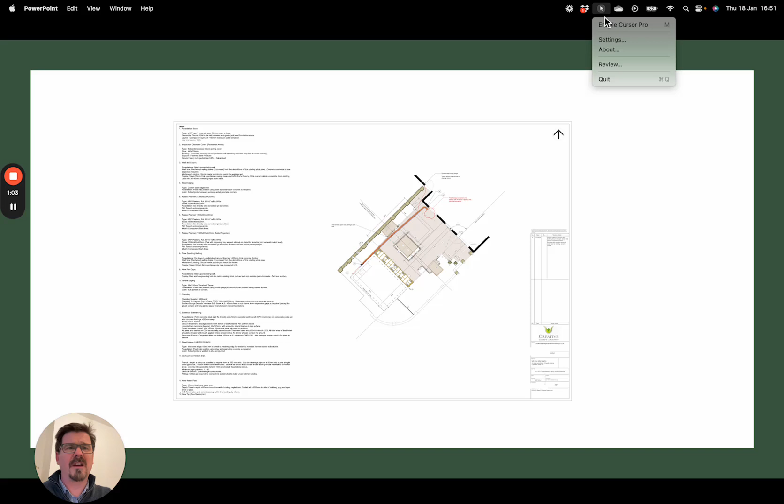As we work through the process of thinking about the garden and how it's constructed, we often think about the initial groundworks and the foundations that go into the paving, and in its simplest form that could be the foundation stone for a simple patio area. In this particular example, we've got a project where we've got to install and connect into existing drainage. We're providing drainage pipes out to a new garden building at the bottom of the garden.

We're thinking about the footings required and the retaining required for these small planting beds, as well as the footings for the water feature here and the raised planters and beds here. We've got inset manhole covers where we're replacing to hide away existing services as best as possible. And we're also thinking about the position of the posts and all of the detailing for the decking platform that runs to the front of the building here.

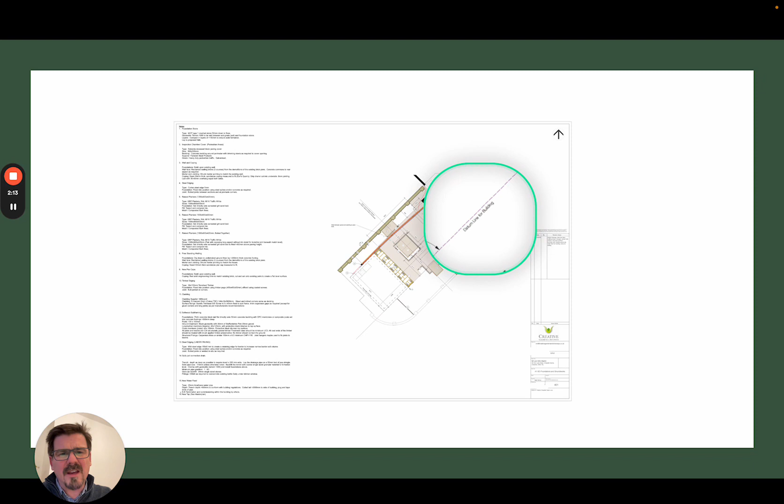All of these things interact at the underground level to ensure that what we're laying out will functionally work when we get above ground. Similarly, we're also looking to give some dimensions on these plans so that everything is relatable to the design intent. With that in mind, we're giving a datum line so that we know that the building has been given a clear dimension and a clear position within the garden. And quite often, once we've got core elements of the foundations in place, the other elements of the garden actually start to come together quite easily.

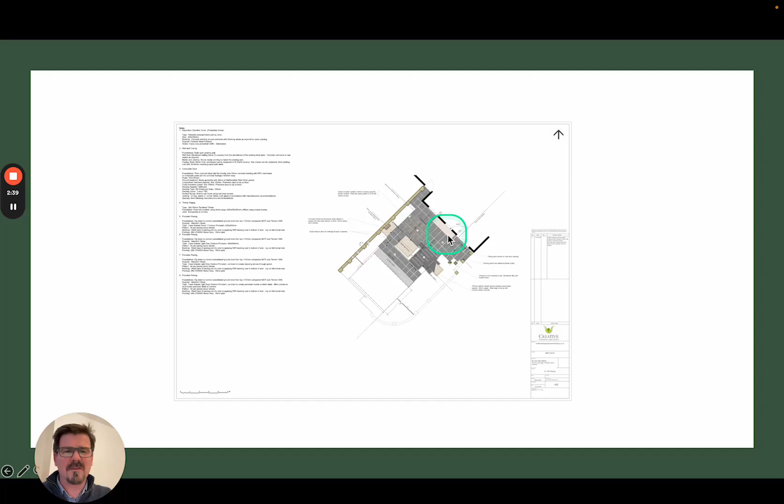So once that formation's in, the setting out plan for the paving in this instance will be more about the detailing, the cutting, and how we're getting equal joints around the perimeter area here. It might be how we're cutting some stepping stones. And you'll notice on the drawings we've got these little sort of numbers dotted around the place. They correspond to the specification of works, which again helps to tie up all of the decision making that goes on as part of the process of developing these gardens going forward.

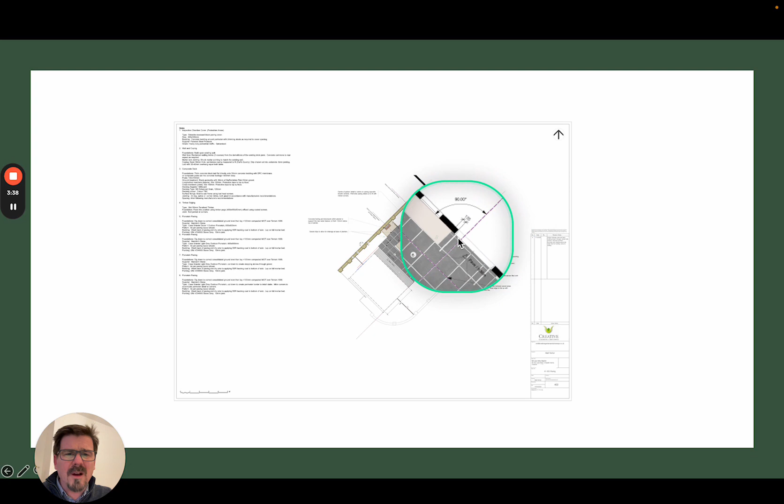So if we have a particular paving material, it may need to be laid in a particular way with a particular joint size and maybe even a particular joint pointing material. All of that information needs to be detailed so that we've got all of those decisions recorded going forward. So in regard to the paving, we've got some datum lines again for the building and so on. We're actually allocating a line through here which will be the first line of paving that's going to be cut, so that as they work back towards the house, there'll be a small cut against the house, but this will be rather insignificant and not noticeable.

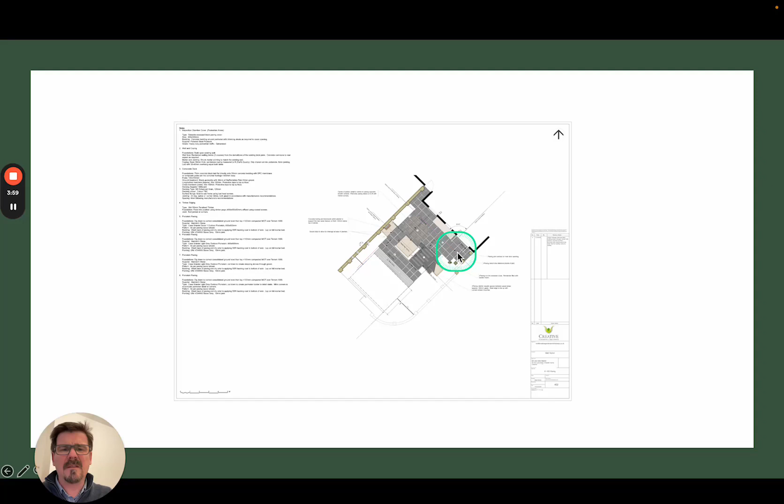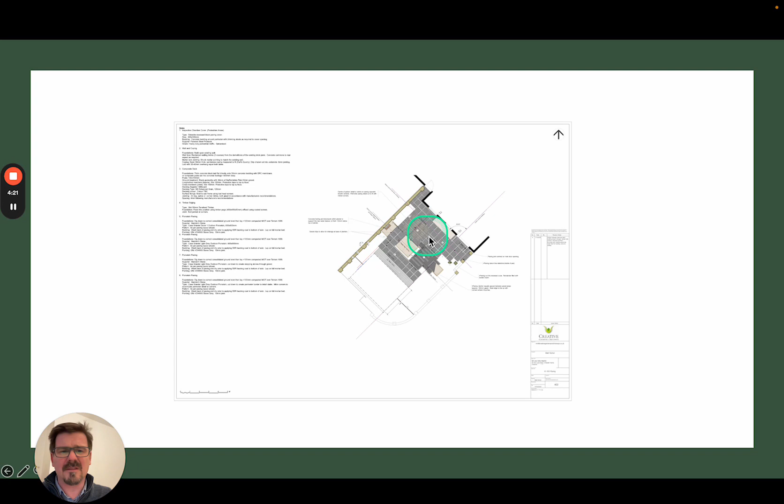And that's been designed into the paving layout, as has the relationship of the paving to the manholes, to the planting beds and so on. That clear relationship and the tolerance that we're working to in this particular garden is to a 6mm joint tolerance on the porcelain paving that's being laid. So the paving has its setting out drawing, and that's often a large part of the project. But we also have in this project some trellis work going in, and this trellis drawing here shows the specification for the trellis on the two different sides of the garden. There's two different behaviours with what we're doing with the trellis.

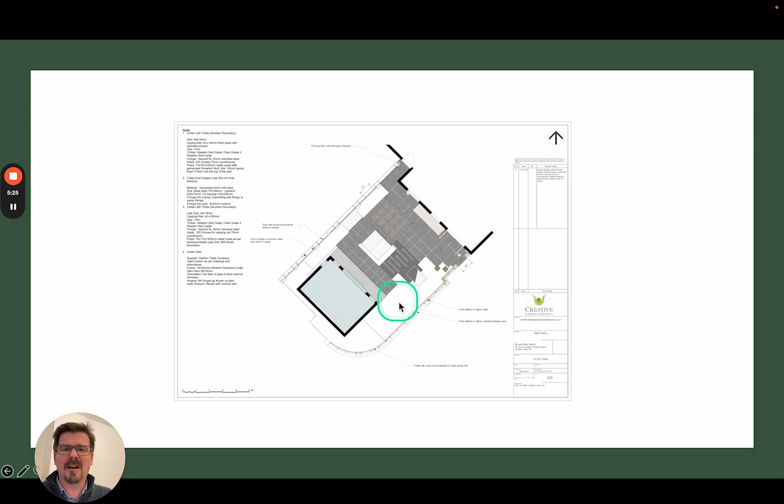We've also got a bespoke gate coming into this project. And as we're building up the layers, you start with the foundations, you move on to the higher layers. If we had pergolas and so on, we may well have setting out drawings for those pergolas. And they may also have corresponding drawings, construction intent drawings, which is one of the other videos that we've done, where we're detailing all of the dimensions for that particular pergola. So this is really about how things fit in space. The construction intent drawings are often about the detail, about what the actual thing is.

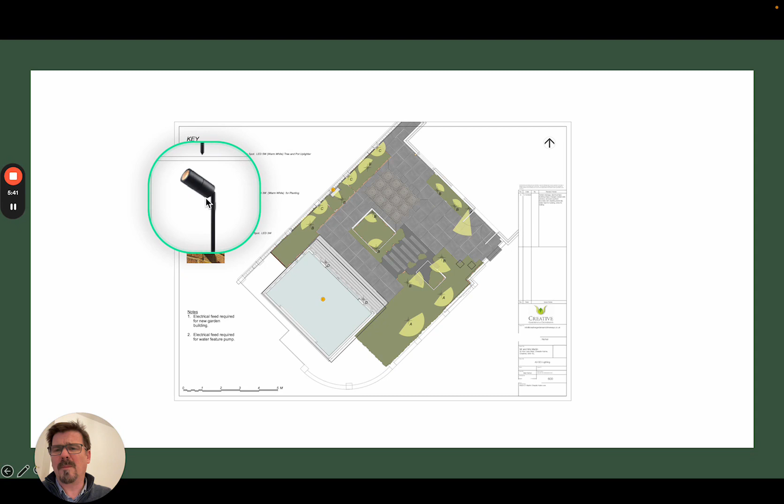So the final typical drawing that we put together for most projects is a lighting drawing, and this would be looking to explain the sort of light fittings that we might be putting in. So in this instance, some simple black spike spots and some downlighters on the building. We're also detailing that we need some water feed for the pump, and we also need a feed going into the garden building. So going right back to the beginning, we're also tying in the feeds. The water feed and the electrical feed here are marked in red and blue on the groundworks plan, pulling all of these different elements together.

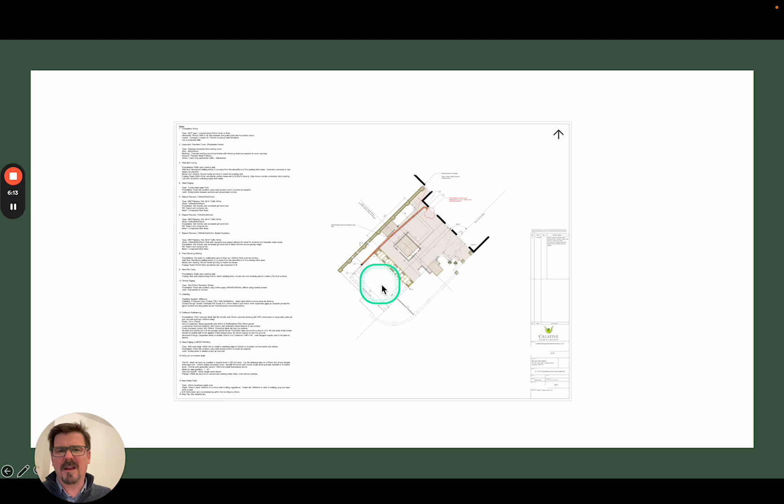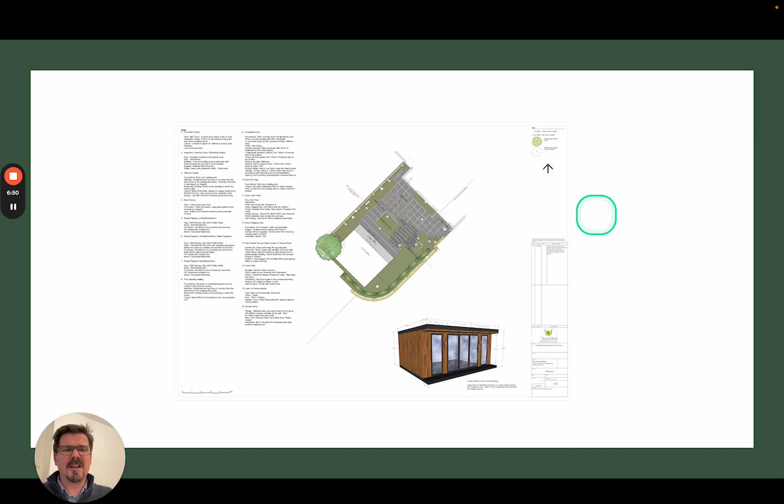So we've got a layered set of drawings, and ultimately we're looking to produce a master plan. So once we've got all of the detail rationalised and all of the different elements of the project pulled together, we're then able to pull together a master plan which shows all of those components of the garden put together in a way that we know is going to fit because we've done the detailing. So that's setting out drawings, and they obviously, as we've talked about, sit alongside some of the other drawings that we've got as part of the package that we put together for every project that we do.